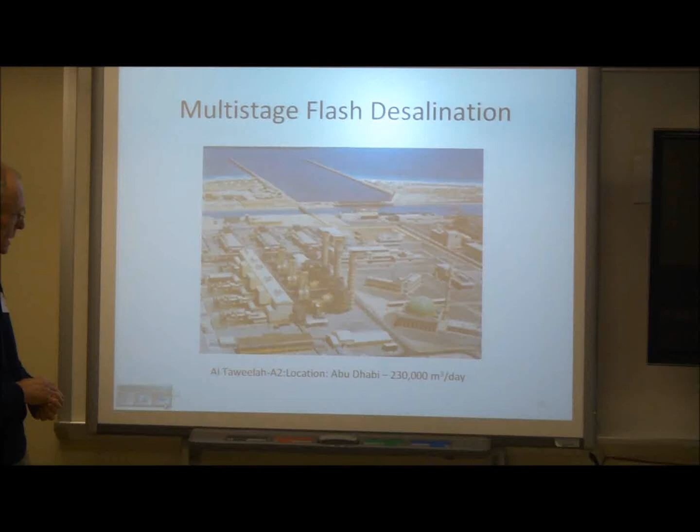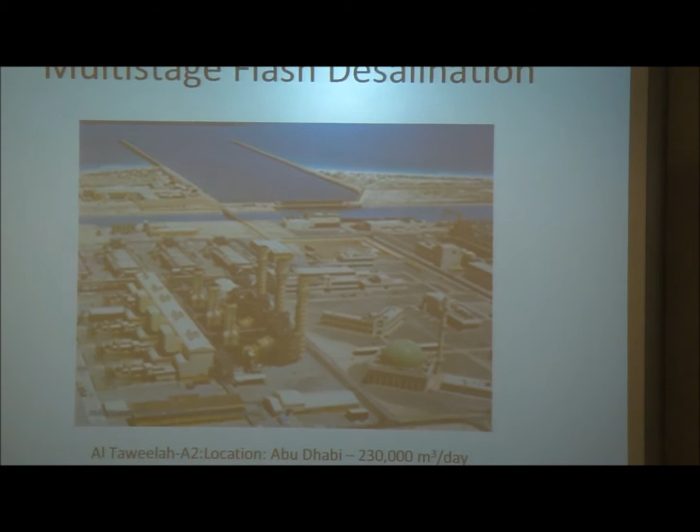I'm not sure there's much to scale it, but I think this is a semi-truck. I'm not sure it's clear enough for you, but these plants are really, really big. This one produces 230,000 cubic meters of water per day.

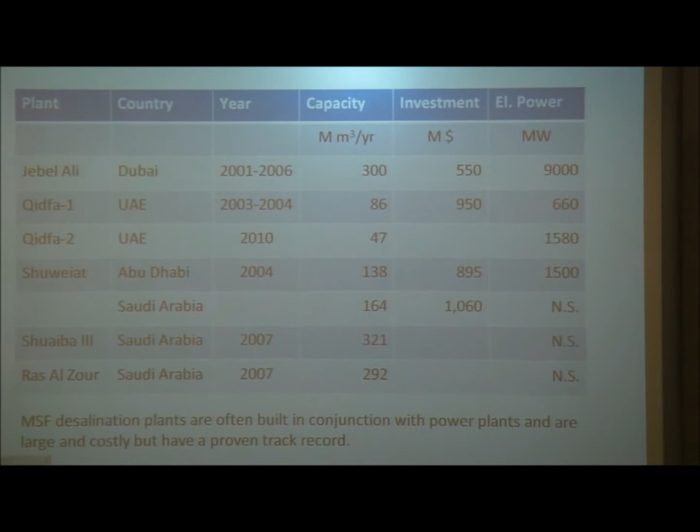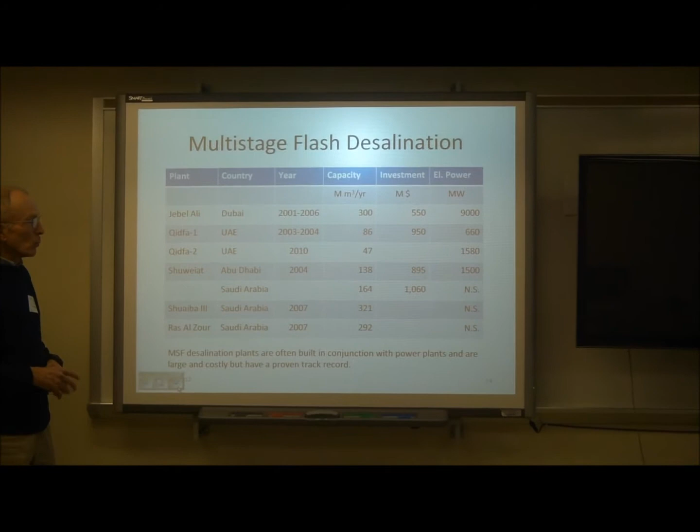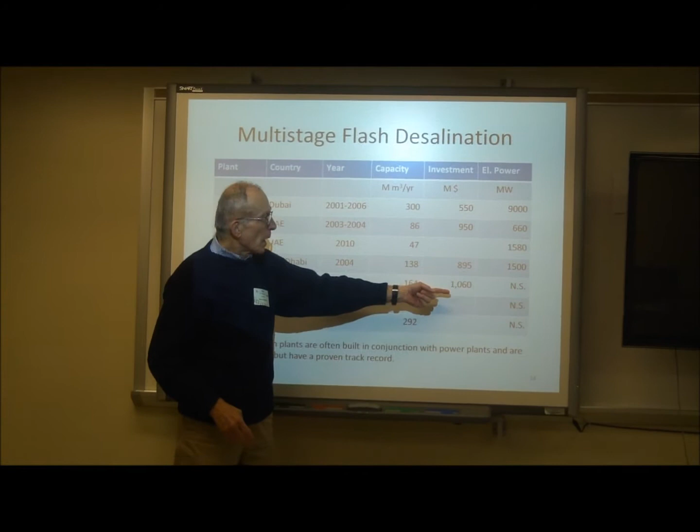This next chart shows some other plants. And I won't go through it in detail, except to point out three things. These plants are in general very big. These are the two biggest desalination plants in the world, at the time this data was collected. So they're very large. They require very large capital investments. This is millions of dollars, so up to $1 billion for the capital investment.

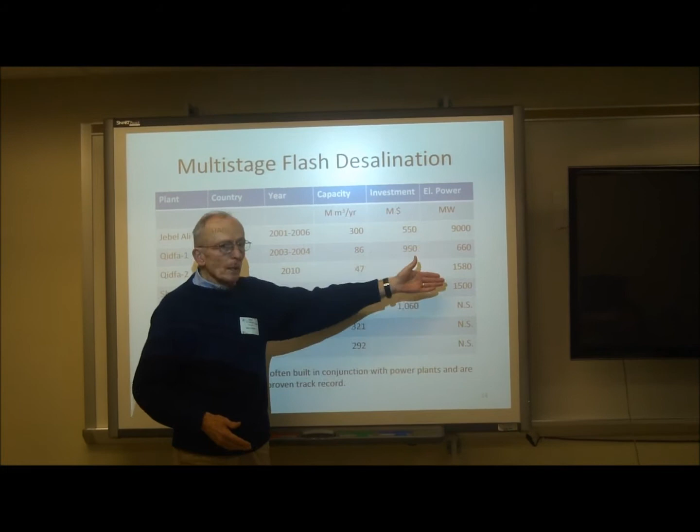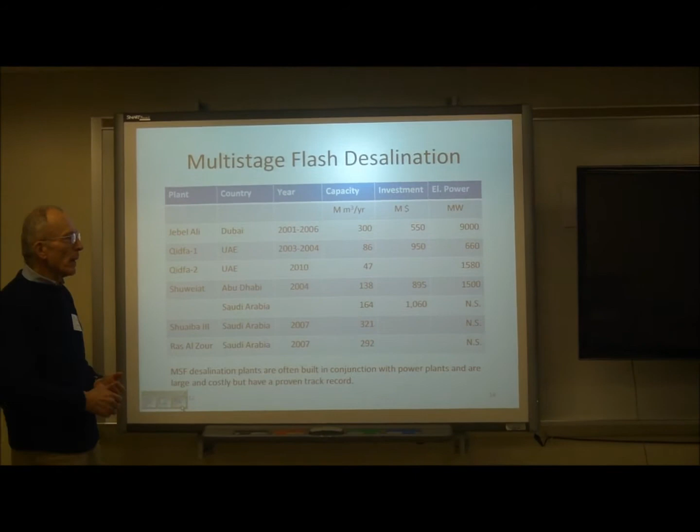Because steam heat is used, they're often built in conjunction with electric power plants. These are big electric power plants. A nuclear facility might produce 1,000 megawatts of electric power. And here's one that produces 9,000, so it's like 9 nuclear power stations to desal the water. And the final thing is that these have been in operation for many years. So it's a well-demonstrated, well-proven technology.

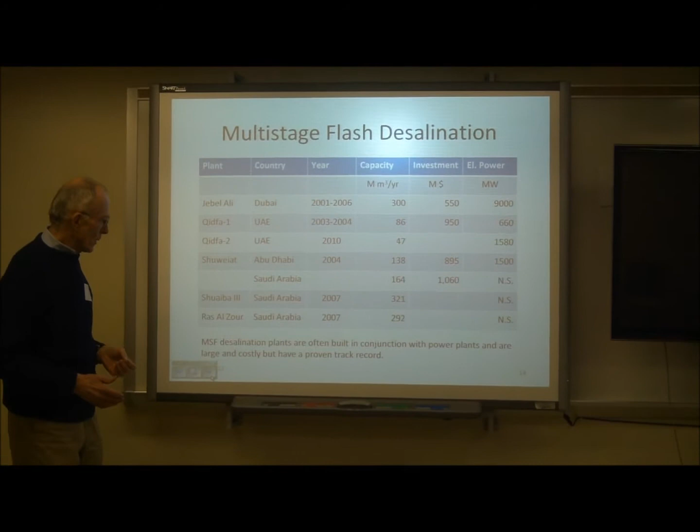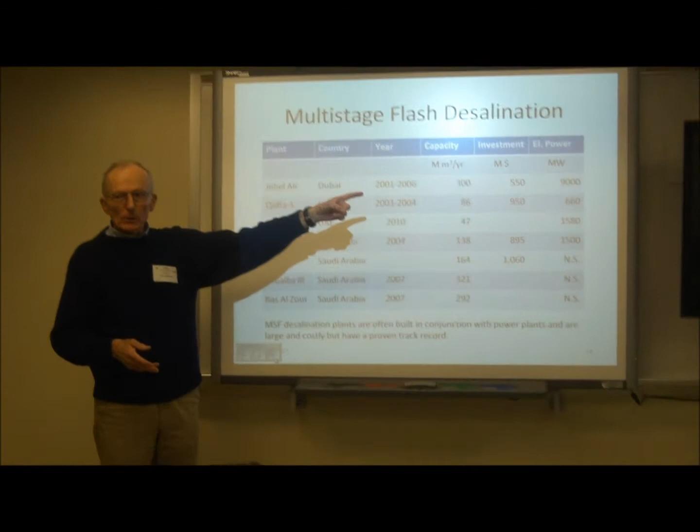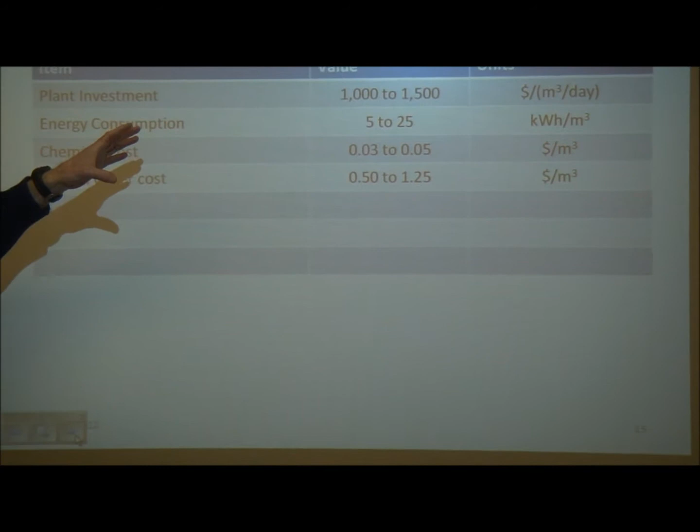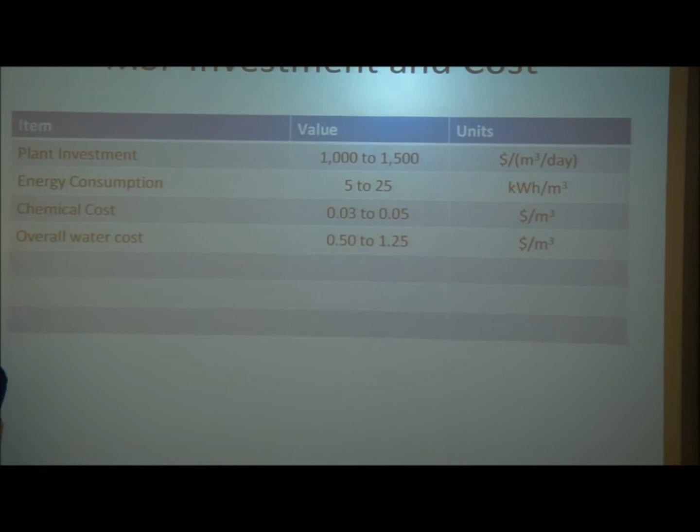The economics of this process are a little bit harder to pin down, partly because you can't be sure how the people in these oil-rich countries charge the cost of oil to the plant. You can't be sure exactly how they distribute the investment between the electric power generation facility and the desalination facility. But these are some of the numbers I've been able to put together. The plant investment looks like $1,000 to $1,500 per cubic meter of water per day. The energy consumption, the number I've shown you before, is maybe 5 to 25 kilowatt hours per cubic meter. The chemical cost turns out to be relatively low because the water doesn't require very much pre-treatment. And the overall water cost is as little as 50 cents, half a dollar per cubic meter.

When I tried to find out the cost of water from conventional sources, from surface water or from aquifers, I came up with the average cost as perhaps $1.50 per 1,000 gallons, which is about 35 or 40 cents per cubic meter. Wow, that's a huge difference. Well, it's not huge. Overall, it's 50 cents to $1.25, and you're saying what it costs us to get our water, right? It's about 35 cents.

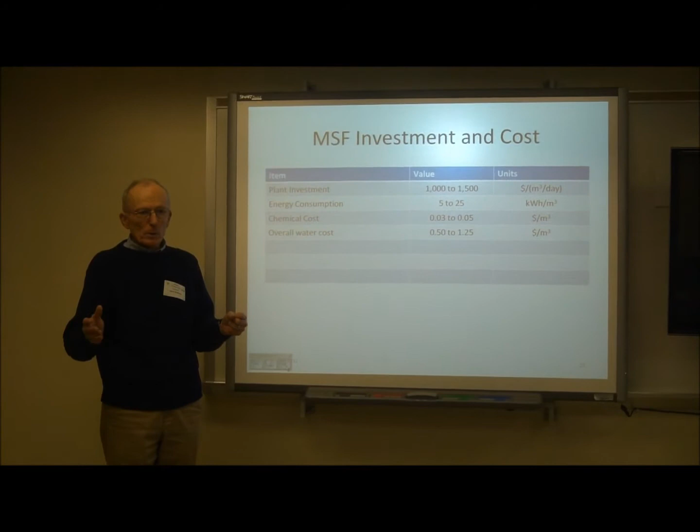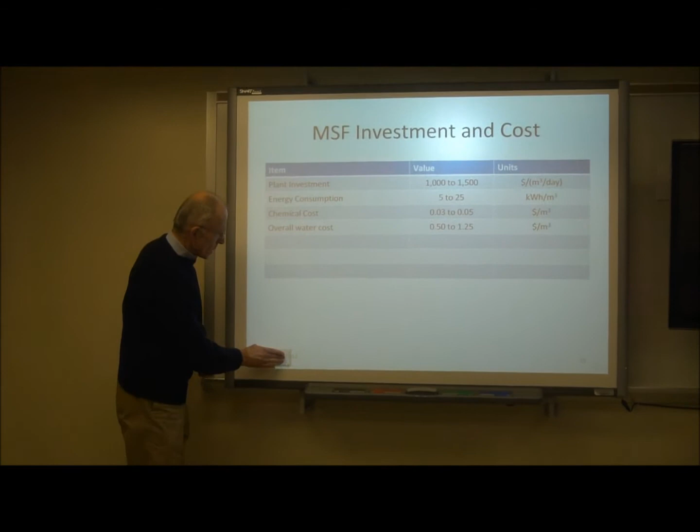Well, the average cost is 35 cents, but as is true with these plants, the bigger the water treatment facility, the lower the cost of the water. So the water treatment facility in Chicago, for example, probably produces water for way less than 30 or 40 cents per cubic meter, whereas the one in Dennis, much smaller population, probably costs more. Okay, I'd like to turn now to reverse osmosis. Oh no, first the advantages and disadvantages.

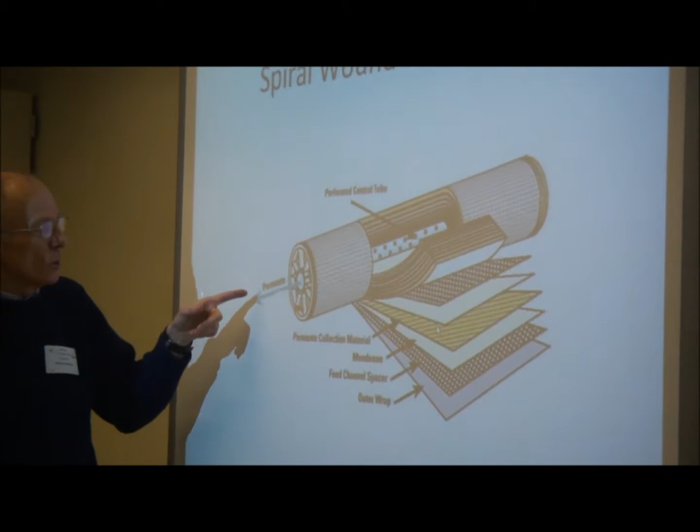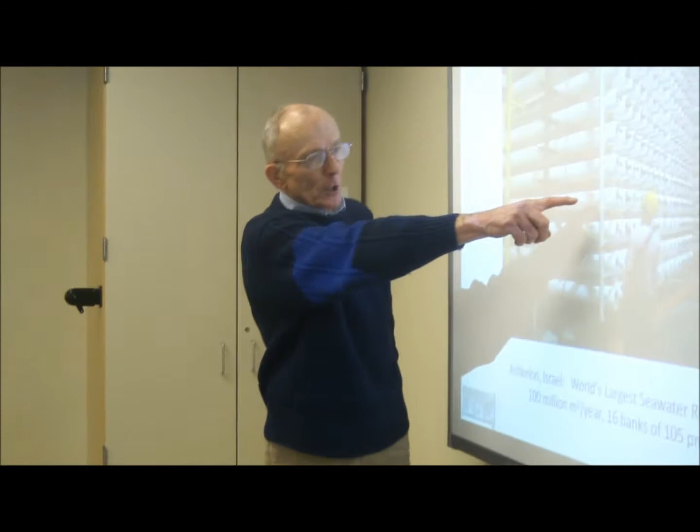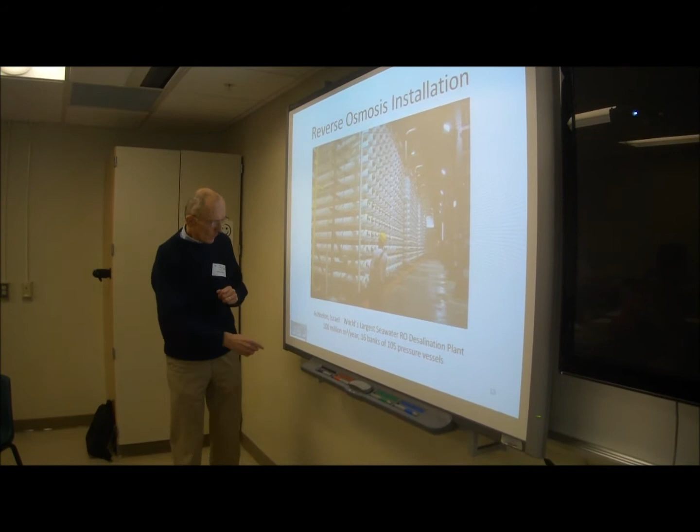And as you probably can see from this photograph, it's composed of modular banks. There are 4 banks shown here of the 16, each of which contains 105 pressure vessels. In each pressure vessel, these cylinders that you see probably contain 4 or 5 of the spiral wound modules that I showed you in the previous chart. So it is also a robust technology, and they require lower energy than the multi-stage flash plants.

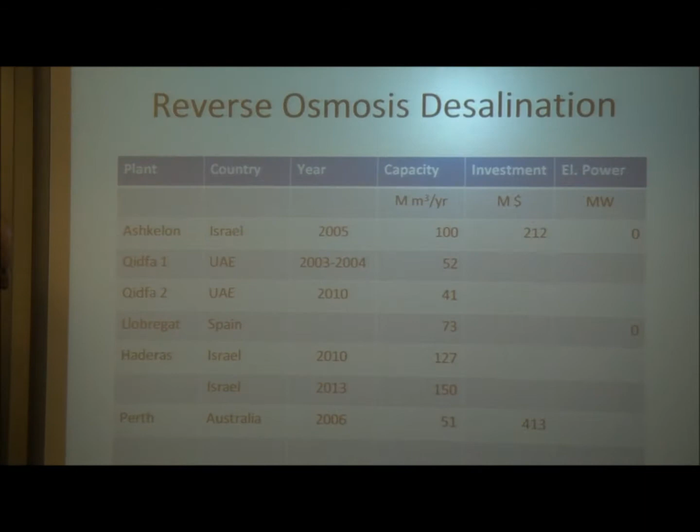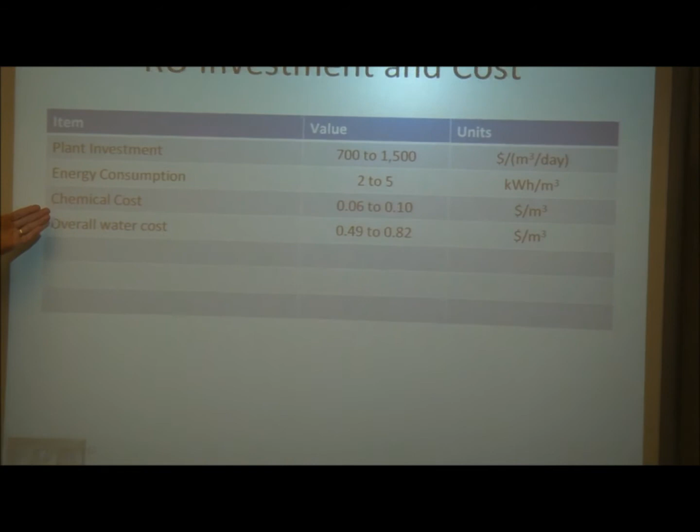This is what I've been able to learn about the economics of RO plants. The plant investment is a bit lower than for multi-stage flash per unit of output. The energy consumption is quite significantly less. The chemical cost is more, and the overall water cost ranges from a bit less, because the energy cost is less, to about the same, because the chemical cost is more.

Wait, can you stay on this for a second? Can you stay on this page for a second? Sure. Thank you.

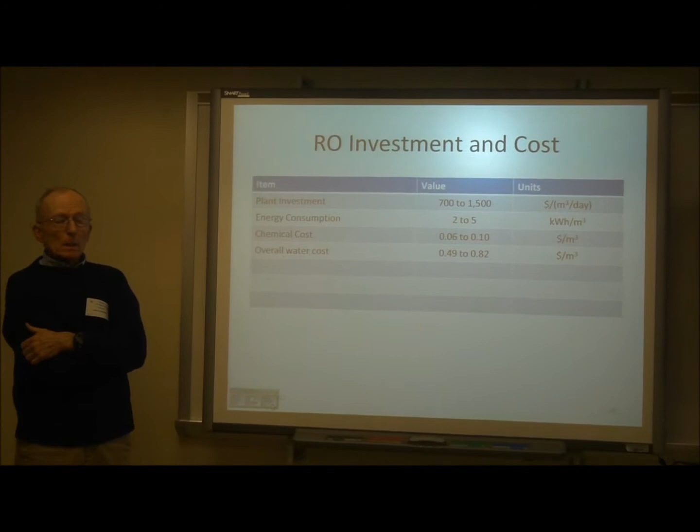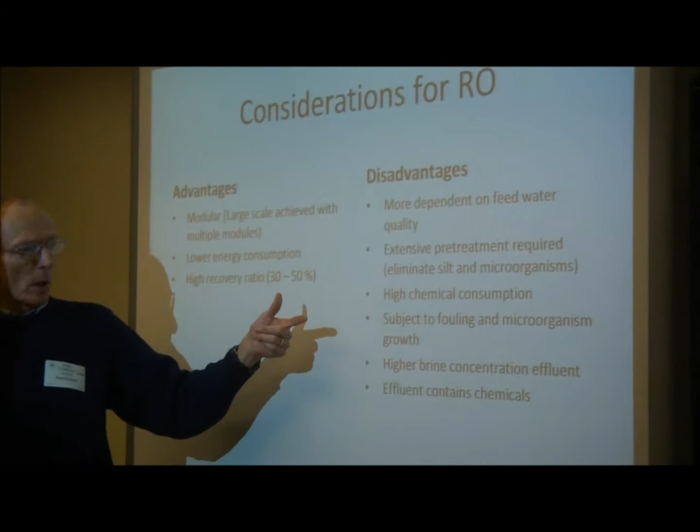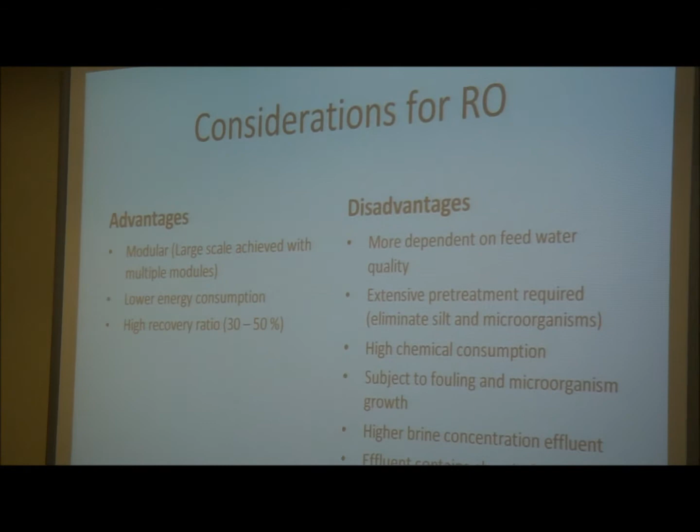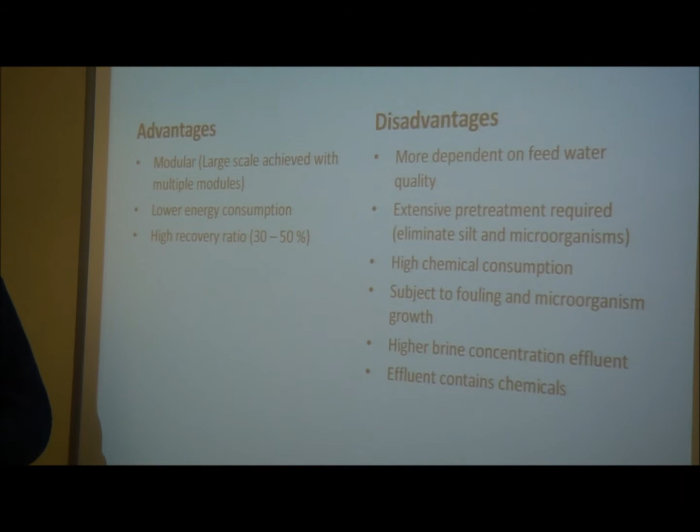So, disadvantages: it's more dependent on feed water quality. Extensive pretreatment is required because it's more dependent on quality, which leads to high chemical consumption. They are subject to fouling and microorganism growth within the very small passages of the reverse osmosis module. They have a higher brine concentration effluent, which sort of counterbalances this advantage of a high recovery ratio. And the effluent, because it's not evaporated from the feedstock, does contain some of the chemicals that are used in the purification.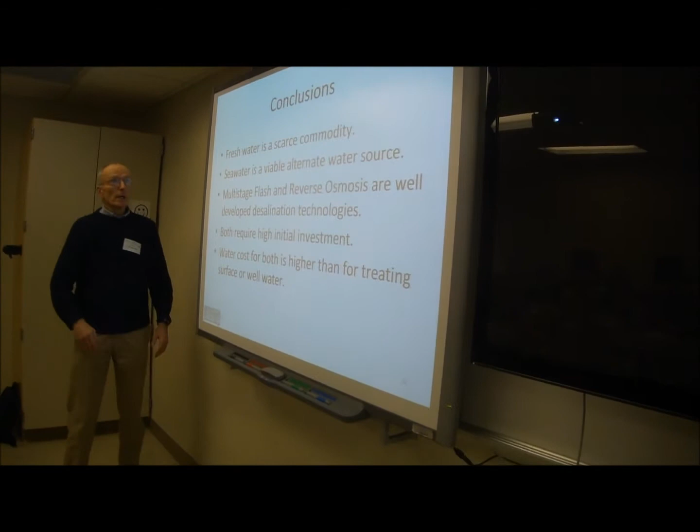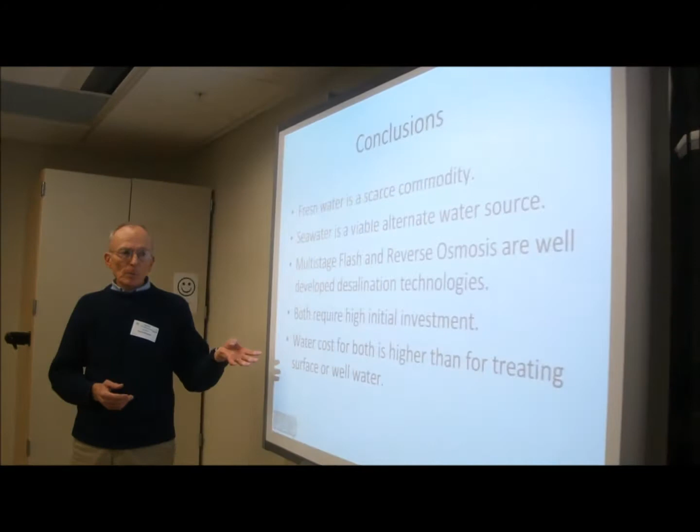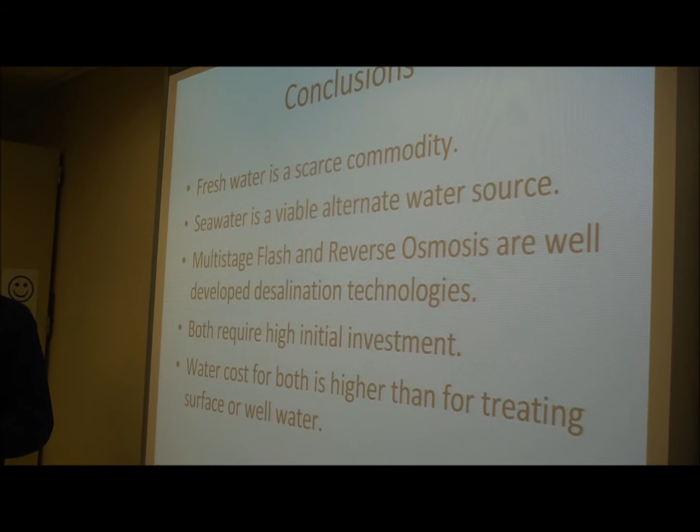Okay, so these are my conclusions from what I've tried to tell you today. Freshwater is now in some places and will become more widely a scarce commodity. But seawater is a viable alternative water source. Both multi-stage flash and reverse osmosis are well-developed desalination technologies and can be used to make potable water. Both require high initial investment, multi-stage flash more so than reverse osmosis. The water cost for both is higher than for treating surface or well water, but not higher by a factor of more than perhaps 2 or 3. So where you need water and have seawater and capital for investment, these are alternate technologies that can produce potable water.

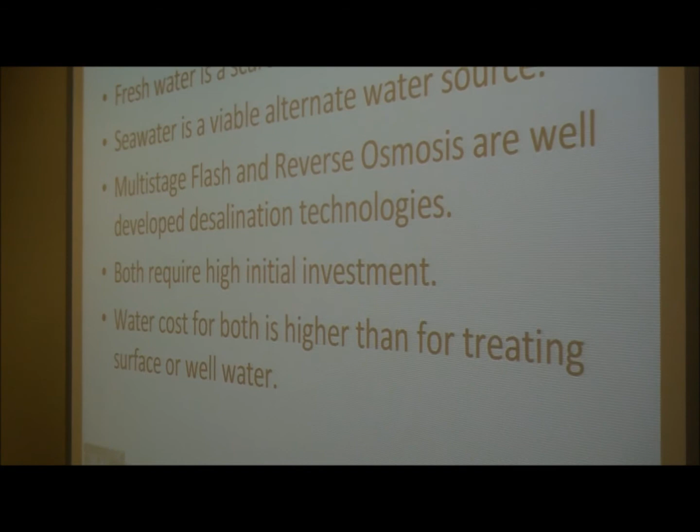Okay, are there any general questions that I might be able to answer? Yes. What do you think, in your professional opinion, is better, multi-stage flash or reverse osmosis? So the company I worked for thought they were going to make a fortune selling reverse osmosis modules in the Arabian Peninsula. What they overlooked was that in the Arabian Peninsula they considered the cost of fuel oil for distillation, for evaporation, 0. It costs about $5 a barrel to get oil out of the ground in Saudi Arabia, and they sell it for $100 a barrel.

So, the cost of fuel for them is very low. So if I were building a city, as they did in Abu Dhabi, and required huge quantities of water, and oil was free, I'd build a multi-stage flash plant. If I lived in Israel, where oil is expensive, where I think they probably don't get much from the Arabian countries, I would build a reverse osmosis plant which can use electric power to drive the pumps to build the pressure to run the reverse osmosis plant. So the definite answer to your question is it depends. Yeah, it depends where you live. That's right.

Yes. In the beginning, you had distillation technologies, and you mentioned evaporation, membrane separation, and freezing. Yes. I hadn't talked about freezing yet. I was about to ask, what is the process when you freeze water? Okay, so when you take brine, seawater, and freeze it, the first ice crystals that form are pure water. So you can freeze salty water to a slush where, I don't know the fraction, some small fraction of the seawater has been converted to ice, and the ice is essentially pure. If you then rinse that with pure water and melt it, you have desalted water.